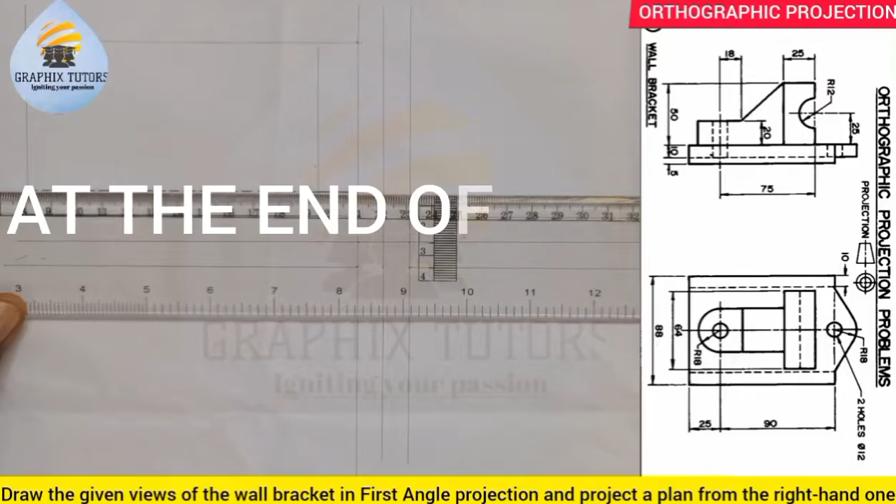In today's video, we are told to draw the given views of the wall bracket in first angle projection and project a plan from the right hand one, referring to the figure displayed at the right hand side of the screen. We are told to redraw these two views, then bring out the third view. In first angle projection, this first one is the front elevation and this is the plan. So first let us reproduce the figure displayed at the right, then we will draw the third part, which is the end view.

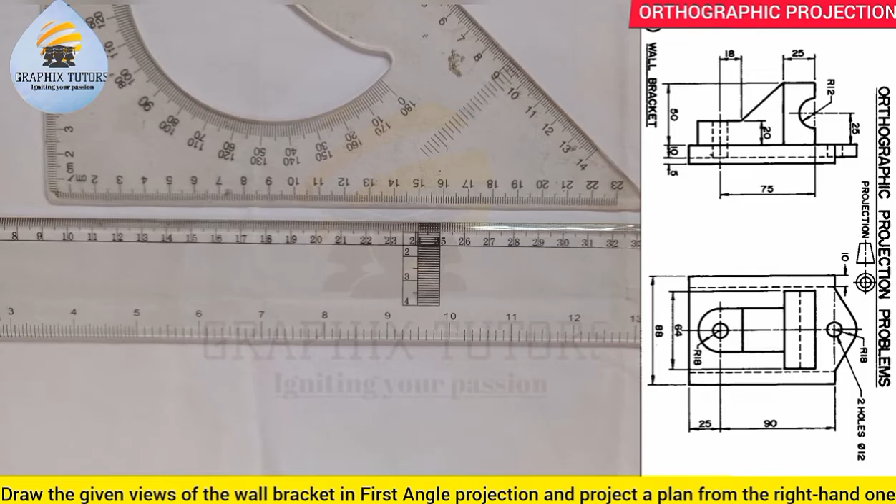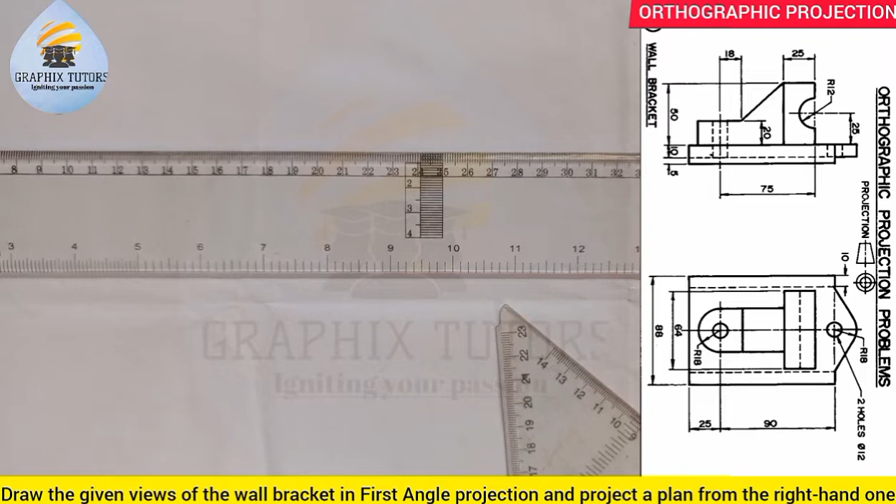So let's start. The first thing you do whenever dealing with orthographic projection is to draw your orthographic axis. You take your instrument and draw the horizontal line this way, then you draw the vertical line this way.

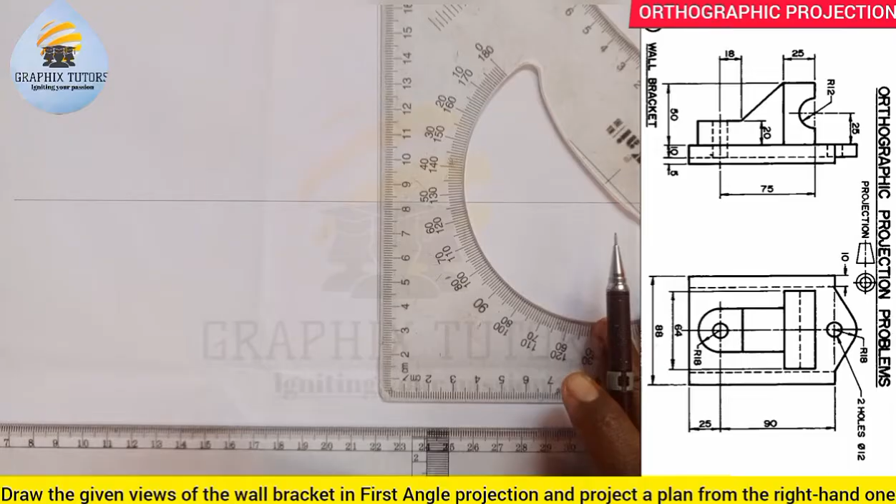And you take your compass and measure 10 millimeter on both sides. You can use your rule, just place it this way. Towards the left you measure 10 millimeter, towards the right you measure 10.

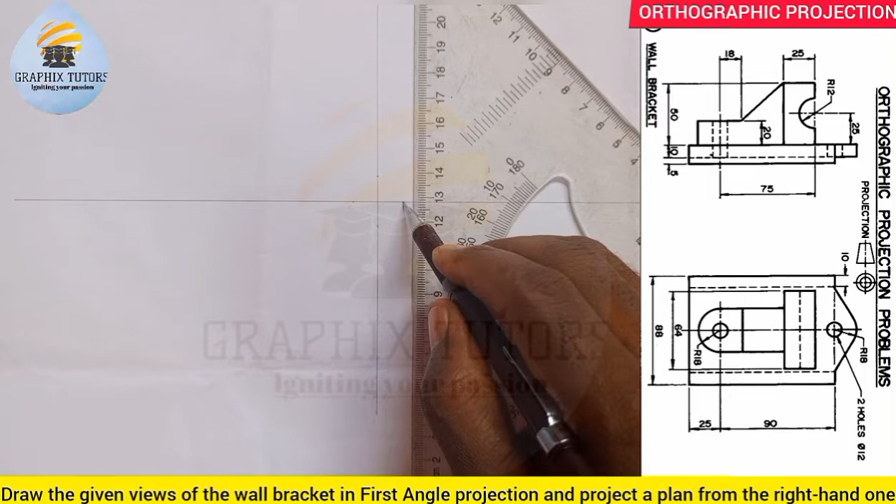And you do that for the vertical line too. Upward you measure 10, downward you also measure 10. And you draw a line that will pass through those points in this fashion, and also in this fashion.

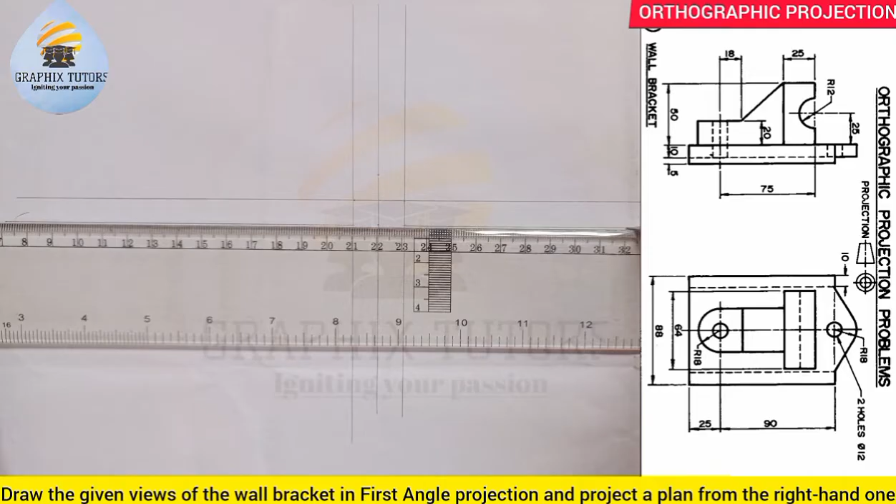You can see that, and you do the same thing for this also. You draw here and stop, from here also you draw another one and stop. You come here too and do the same thing, you draw here and you also draw here. So we're taking reference of these two points here, so whatever we're starting from, we'll start our measurement from this end here.

From here, we're giving the length of the front elevation, referring to this particular figure. We're giving the total length to be 25 plus 90, giving us 115, then plus the radius of 18, giving us 115 plus 18, which is 133.

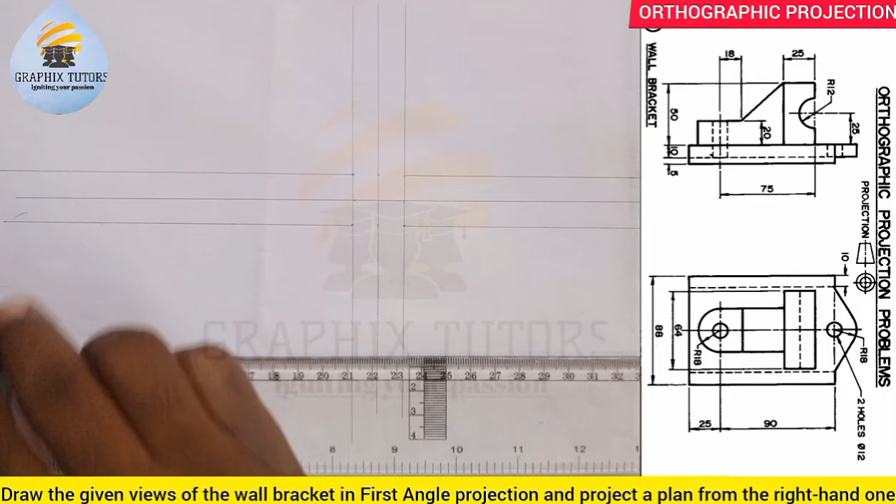So I am going to measure 133 from this side. If I do that from 0, I'll measure 133. 0, this is 130, and this is 133 here. And I'll take it up in this manner. So that is for the length.

Now for the height: the height here is given to be 10 plus 10, that is 20, plus 50, and that is 70. So the entire height here is given to be 70: 10 plus 10 plus 50, and that is 70.

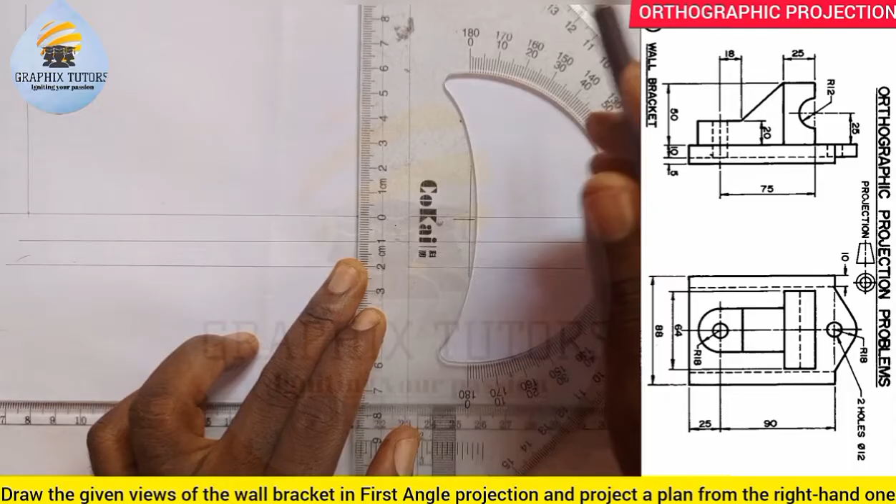So I'll measure 70 from here upward. Let me bring this down. I'll measure 70 from here upward, taking reference from this one here, 0 to 7 is given to be 70 at this point, and I'll close it up. So what I'm doing is just reproducing that given figure view.

Now bring out the box. So I need to start carving my image from that box. So we know very well that I'm going to measure from this part here, from this side. Let's look at the plan, since there's not enough information in the front elevation, I'll look from the plan now.

From this beginning here to this end here, which is from here to this end, from this end to this end, is given to be 115. So I'm going to measure 115, and I'm going to thicken it.

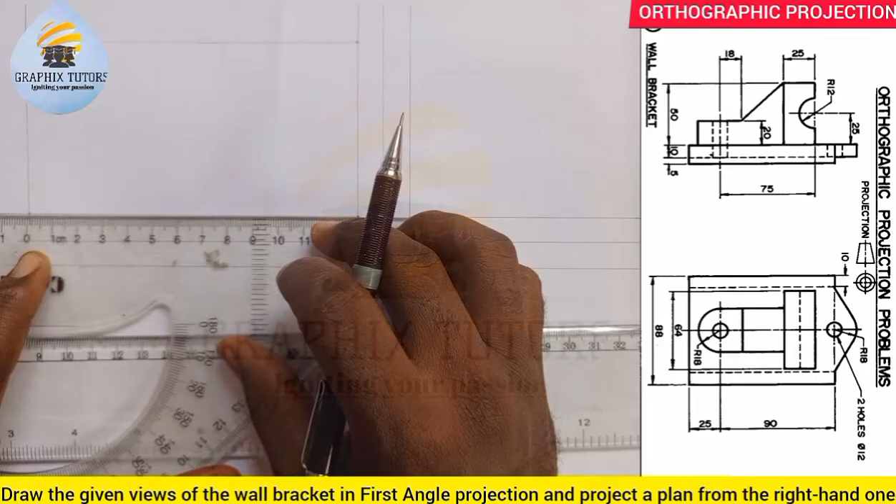So from this beginning here, I'll measure 115. From 0, this is 10, this is 100, 110, 115. That's what we have at that point, which I am going to thicken, straight down to this point at 115. Now that point, I'll take it up with my faint line first, this way.

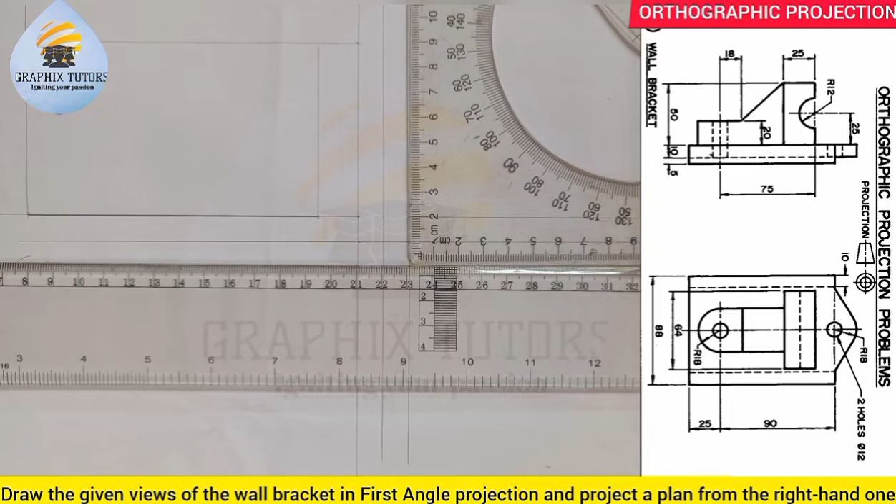You can see that. After doing that, the next thing we're going to do is measure 10, 10 up, because this is, if you look at my arrow, this is 10, this is another 10. So I'm going to measure 10, 10 in two different places. The first one is a hidden line, while the second one is a thick line here.

So this is 0. Let's say this is 10 and this is 10, right? I'm going to draw the first 10 coming out straight, and it is a hidden line from here. Let's do a shot this way.

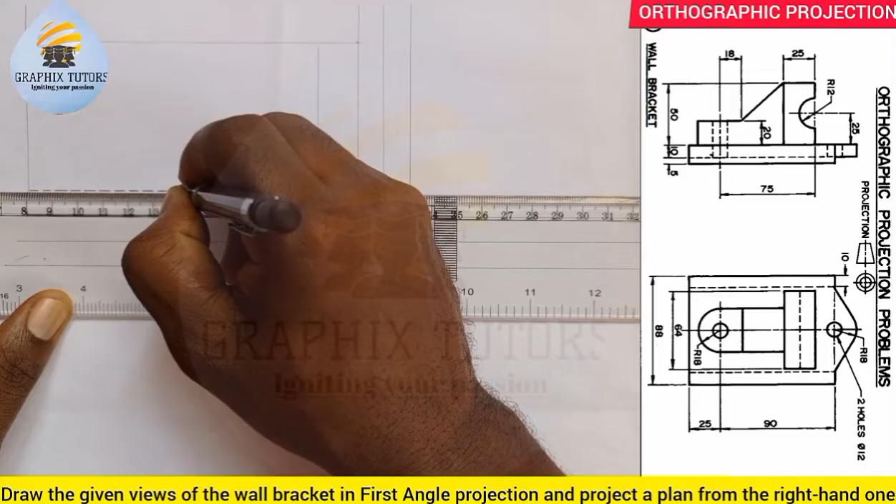Then from here is now a thick line, as shown in the diagram. Then the next 10 is a thick line all through. From here, I'll draw my thick line all through. You can see that.

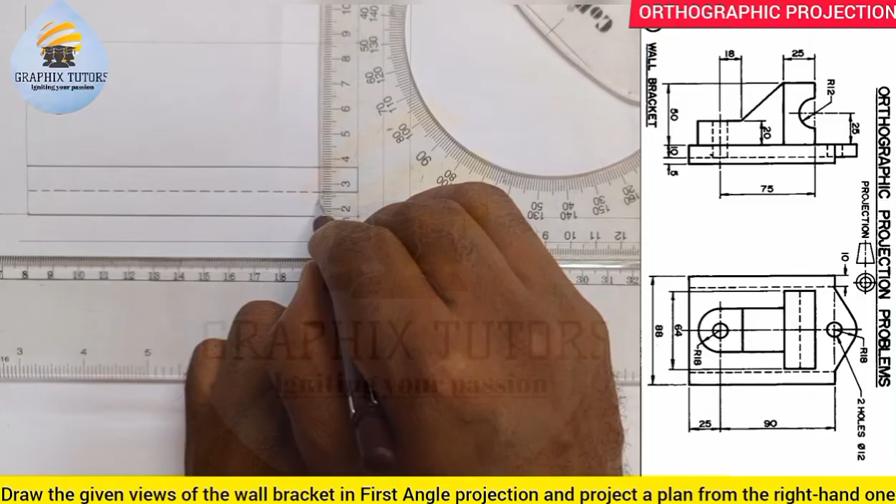I'll close it up. From this point here, I'm going to close it up. And here also, I'll close it up. From here too, I'll close it up.

Is that okay? Now the next thing is, what I'll do here now will be to get to this center here. Look at this line here. This is this line of 75 here, from this end here.

You look at the plan. Look at the plan from here to this point here. It's given to be 25. And this point here, the same thing as saying this point here, right? So I'm going to measure 25 to get the center of that line that we have there.

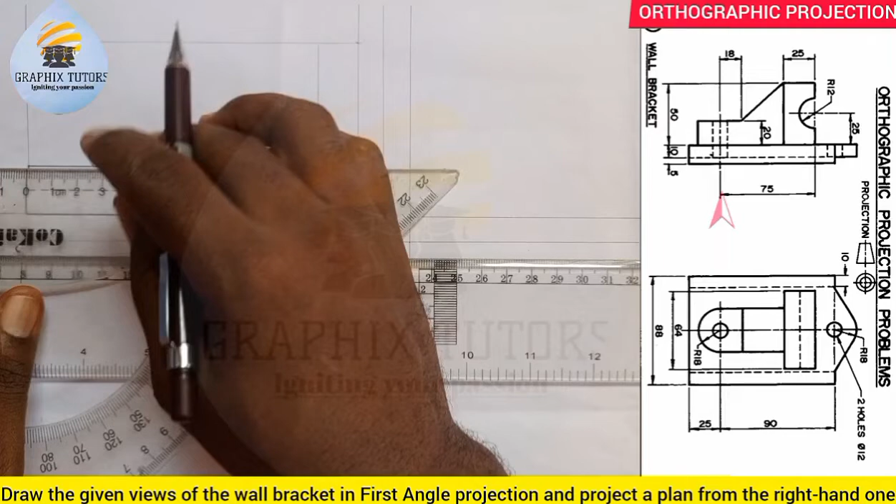So I'll measure 25 from here, from 0, 25, right? That 25 there you're seeing will just be a center line, because we are saying a circle is there, as you can see from the plan. So it will just be a center line you put there to show that a circle is there.

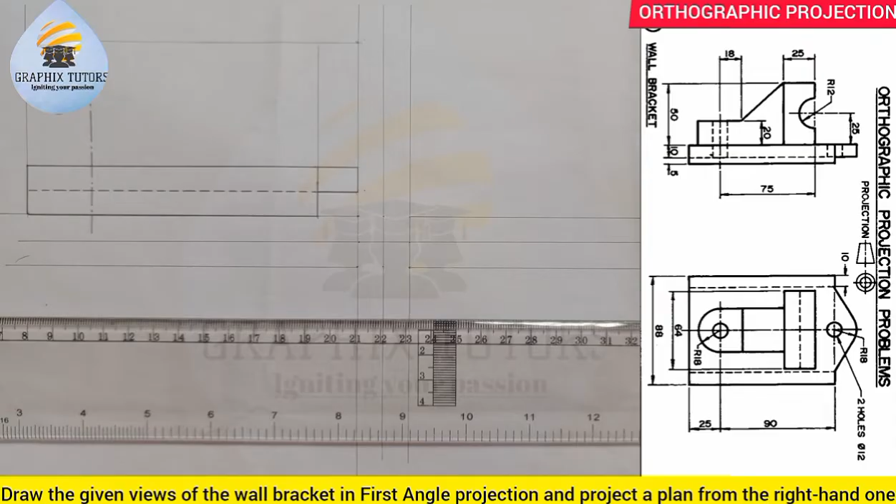Is that again? Now after that, the next thing you now do is the radius of the height, or the radius of that circle there. Before I do that, the height here is given to be, you will now measure a height of, like I told you, 20.

So I'll measure a height of 20 from this base here. This is 20 here. And I'll draw a faint line first of all in this fashion. Can you see that?

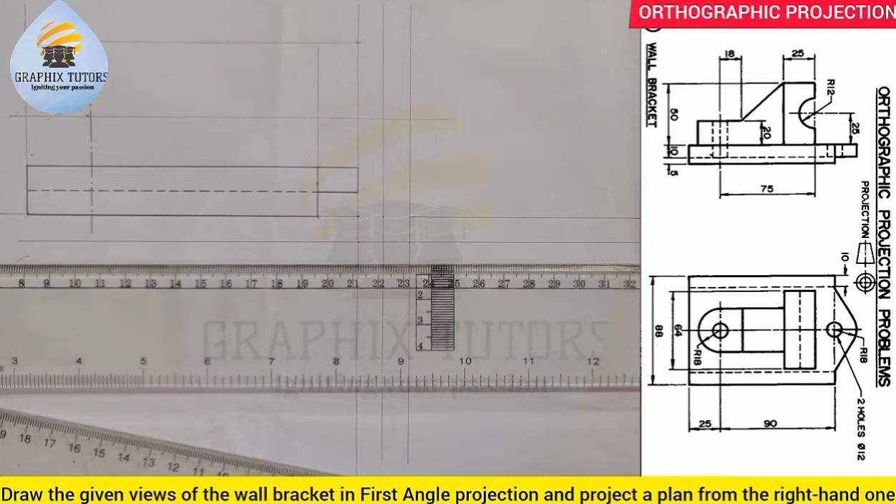Now after you've done that, the next thing you now do is, if you look at the radius from the plan of this same figure you are seeing here, this figure here is the same thing here. We have a radius that looks to be 18, right? Radius of 18 from the center.

Look at the arrow. So from here, I'm going to measure 18 backward from 0, and this is 18 here. I'll just draw, as you look at it, a thick line. I'll thicken it from here downward to this way, taking it from here downward to this way.

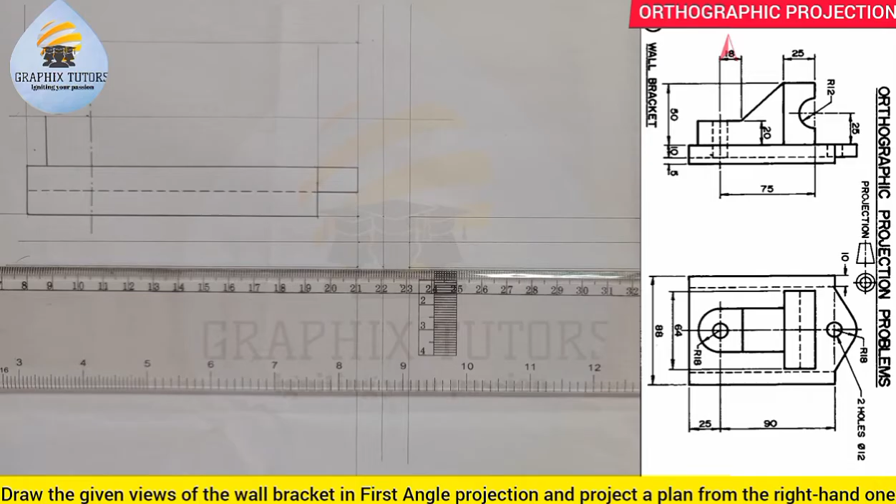You can see that. Now, from this center line to here is 18, according to the radius you're seeing here. Then from this center line to the next point also is 18. So I'll also measure another 18 to the next point here. So from here to here is also 18. 0 to this 20, and this 18.

That's taken now. So I'm going to thicken it to that point. I will thicken it to that point. Can you see that? Now the inside radius given here will be given to be the radius of...

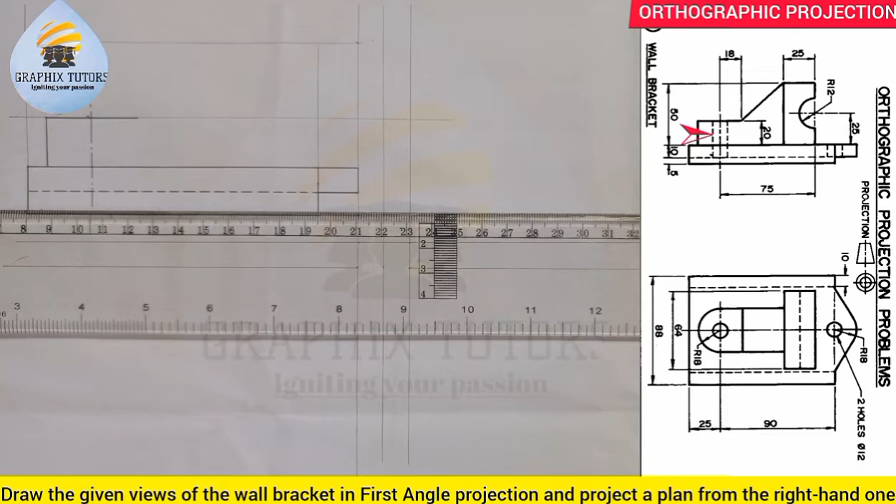We have say 2 holes. You can look at it from this plan here. It says 2 holes, diameter 12. So the circle you're seeing here has a radius of 6. Is that taken? So the circle you're seeing here has a radius of 6.

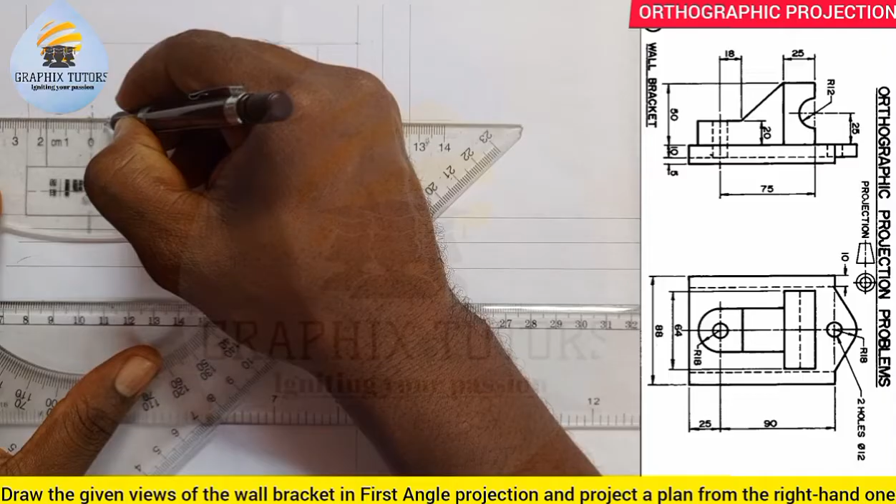With a diameter of 12. So if I measure 6 to both sides, starting from my 0 to the left, I measure 6. This is 0 to 5, then this is 6. To the right, I measure 6 also. So this is 6 here too.

Right? Let's check that again. So this 5 and this 6 here, this side is 6. And I'm going to bring it down in this fashion, as a dotted line.

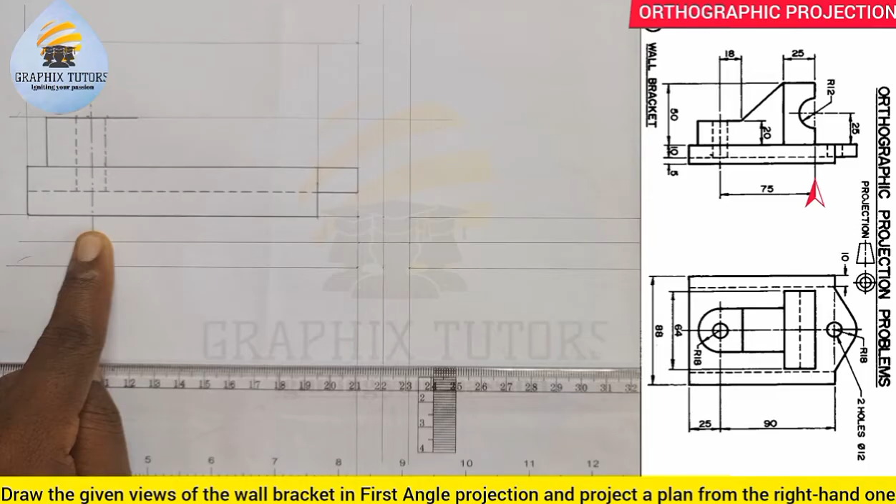So now the next thing that we are going to do: from this center here, which is this center you're seeing here, to this point here is given to be what? 75. So I'm going to measure 75 from that center point there. 75 from the center, 0 to 75. You can see that. And I'll take it up. It will go and touch the highest point here. Is that taken? Faint line first.

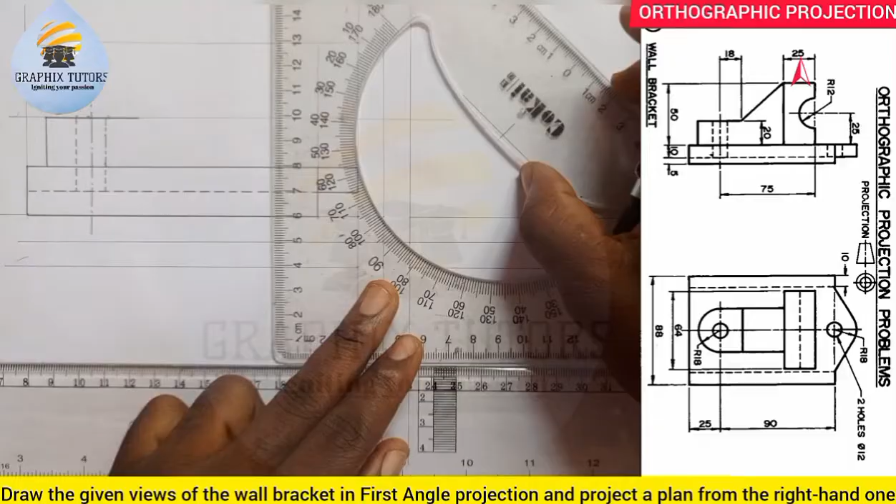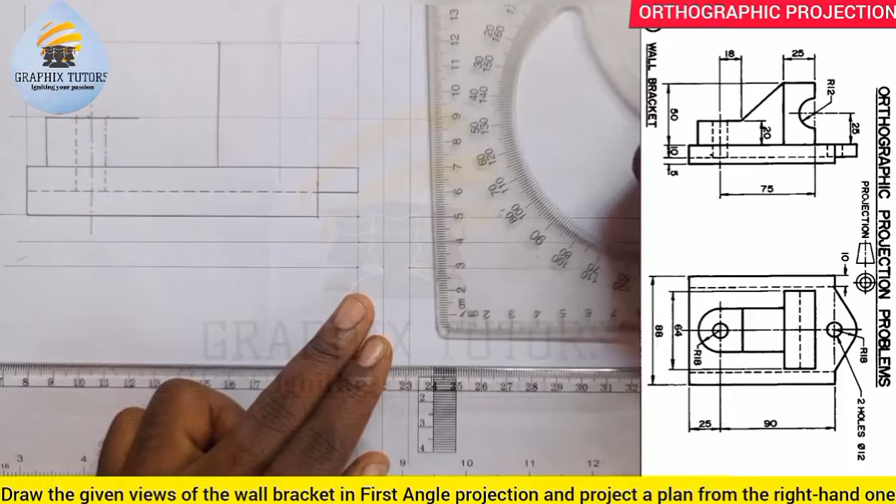Then from the end here, which is this end you're seeing here, I'll measure 25. So I'll measure 25 in this direction from the end here. 0 to 25. Right? So from there, I'll bring that down with my thick line. You can see that. Now that top is touching this point here, right? So I'll just draw my line from that point to come and touch this point here.

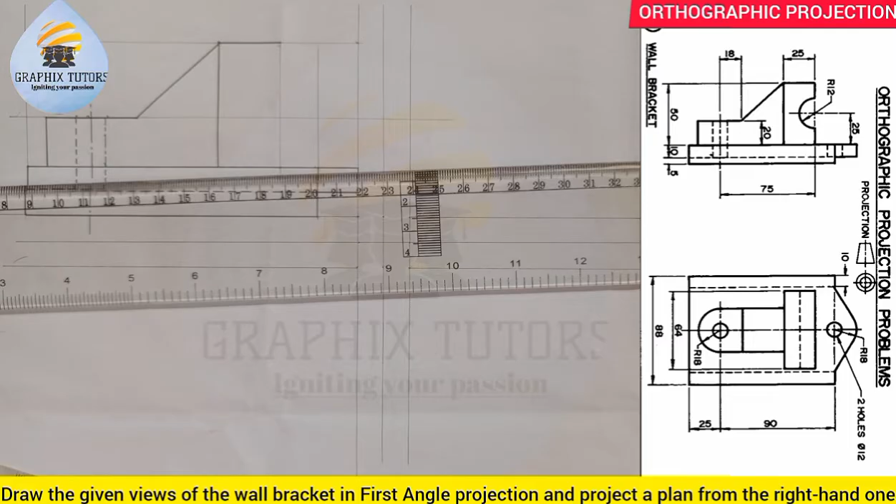Right? After doing that, I'll also thicken this point too. From here, I measured to this point here. Is that taken? Now the next thing I'll do is I'll measure a height of 25 upward to get the center of this arc here, this semicircle here. Right? I measure a distance of what? Of 25. So from here, I'll measure a height of 25. This is 0, this 20, this 25.

So here will be another what? Another center. Is that taken? So this point here will be another center. A long, short, or circular center line. Can you see that? So from that point, the semicircle has a radius of what? 12. So I'll take my radius of 12 there.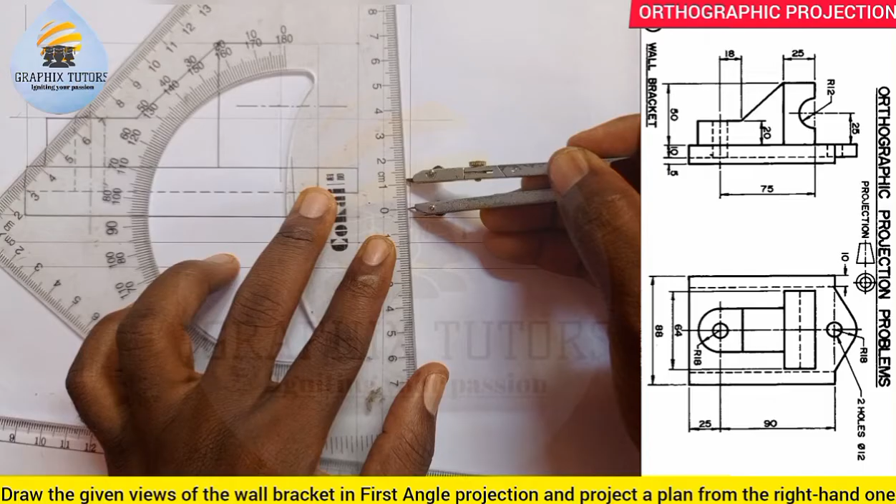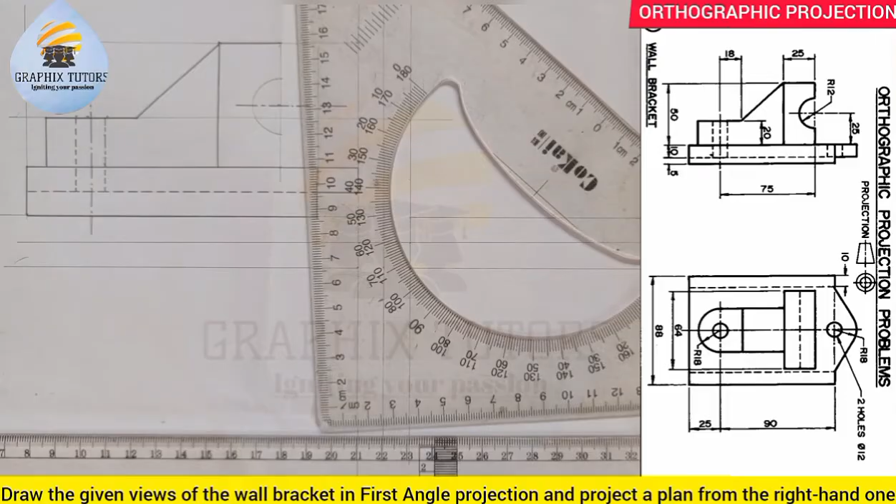So I'm going to measure radius of 12. This is 0. This is 10, 11, 12 here. Right, as the radius. And I'll place it at the center point here. And I'm going to draw my semicircle. You can see that. And I'll close it up with my thick line as shown in diagram. What I'm just doing is I am replicating the diagram, right? So this is what we have there, right?

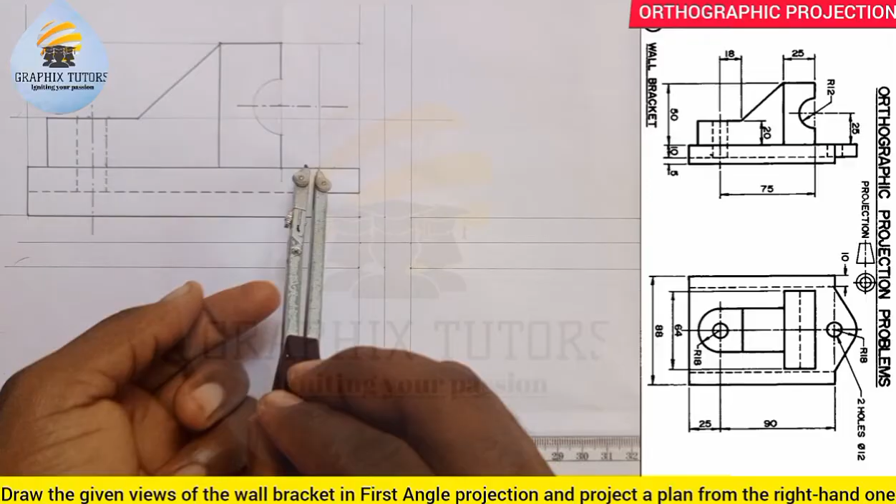So if you look at it closely, then the other end in here, from this point here, we have a circle which has a radius of 6 also, like I told you, 2 holes. So the same thing that happens here will be the same thing that you are going to apply here. Dots here and here, right? Let me measure that again. From here to this point. Then from here I have this, right? And I come here and I have this. That is what I am going to do.

Radius of 6, or you can use your compass, your rule, and measure 6 to both sides. So this is 6 here, and this is also 6 here. So let me bring it down with my hidden line. This is my hidden line here, and this is also my hidden line here. Can you see that? So this is what we have. We have successfully drawn out the front elevation that you can see.

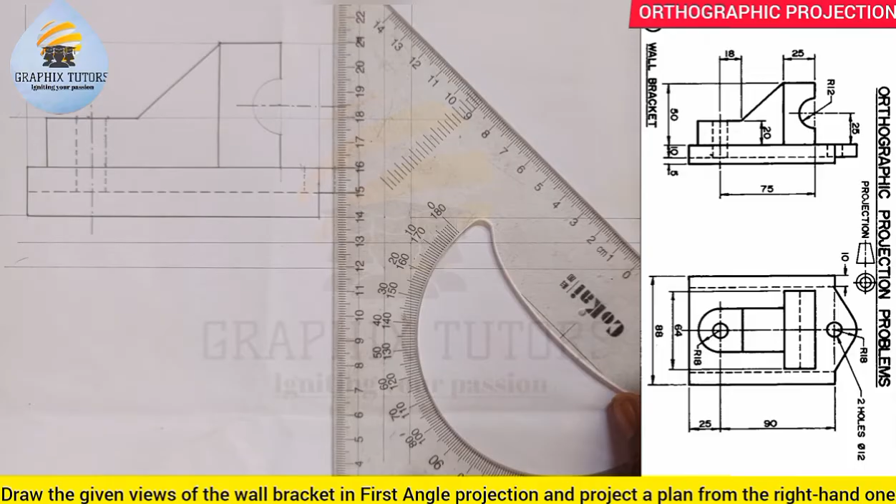Now the next thing that we are going to be doing here is to draw out what? The plan. To draw the plan is not a big deal. What you just do is you need to project those points down. First of all, project the two ends of the plan out. Just these two ends. So the question is, what will be the height of the plan? So the elevation is from here to here, right? So the height of the plan will be looking at it from this direction.

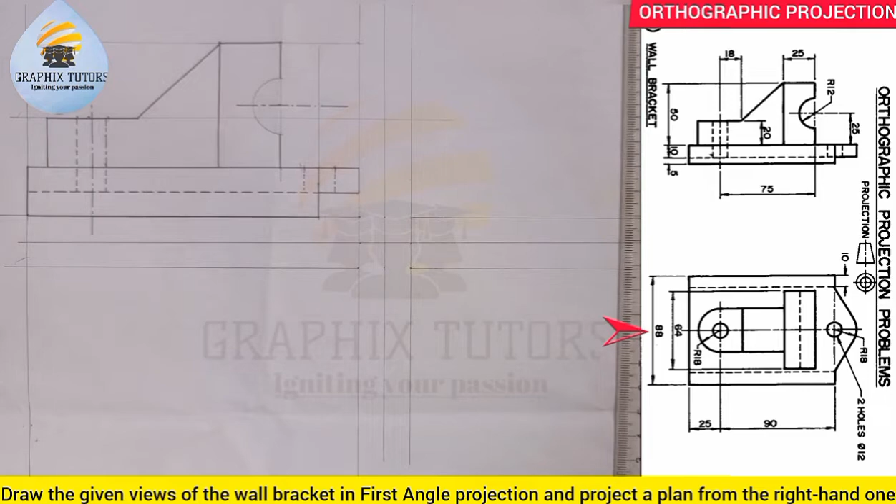And let's give it to be what? If you look at it closely, that is 88, right? We have 88, so I'm going to measure 88, from 0 to 88. This is 80, right? This is 80, and this is 88 here. Hope you can see that. That is 88. And I'll just draw my line in this fashion, faint line first.

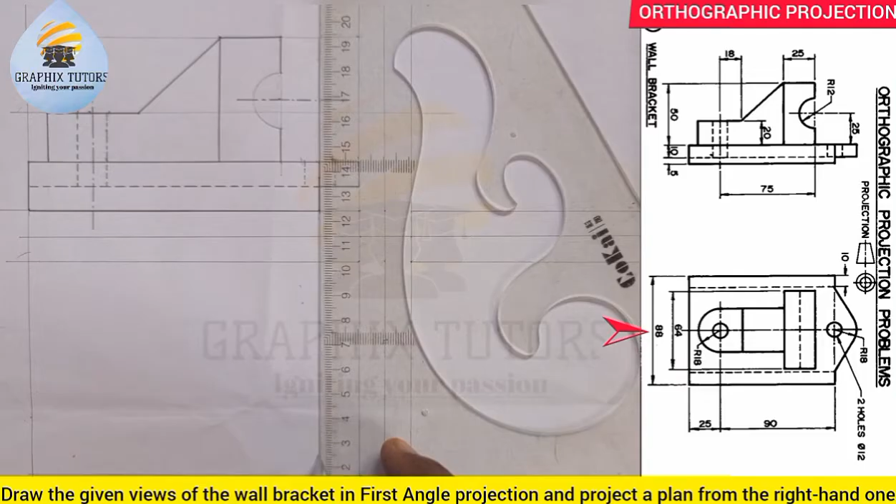Hope you can see that. Now, after doing that, the next thing we'll do is from here to this point here is thickened. You can see that. So which is the point? I'm talking about this point here. I'll bring it down. So it is thickened from here to this point here.

Now the question is, where is the point? This is the point here, right? That is the point from the circle that you have in here. Is that thickened? So I'm going to thicken it from this point to this point here, and from this point to this point here, right? And the same thing from this point also. I'll close it up to this point here as shown in the diagram.

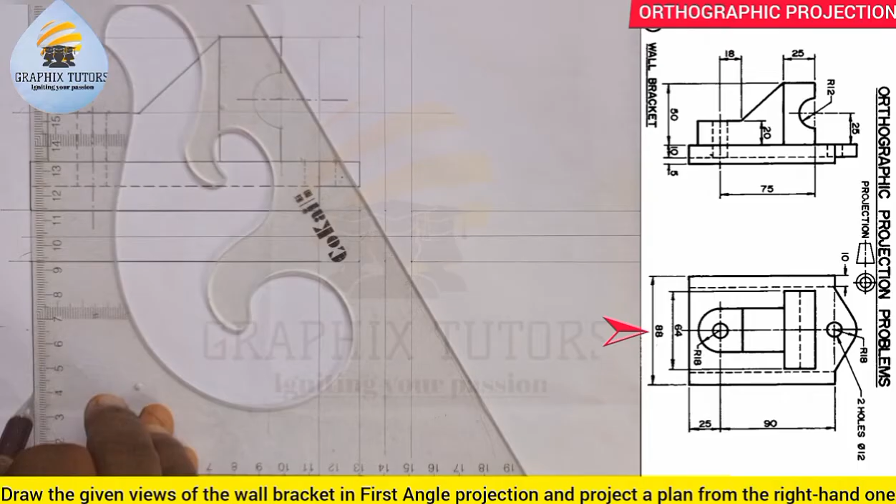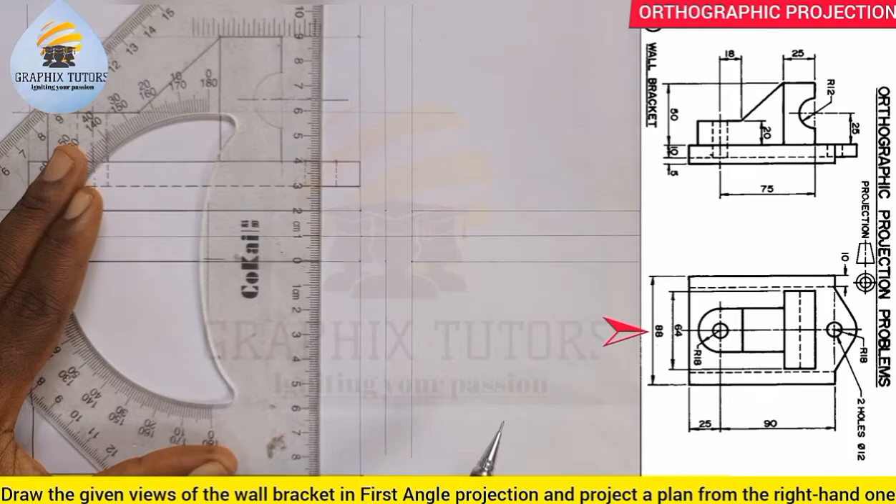Now after that, the next thing is I will have to get the center of 88, which is 44, right? Get the center of 88, which is 44. So if I start from here, this is 0, and this is 88, right? So this will be 44. So I'll use my center line on that point, which will be long, short, this way. Then I'll now measure from this end, right?

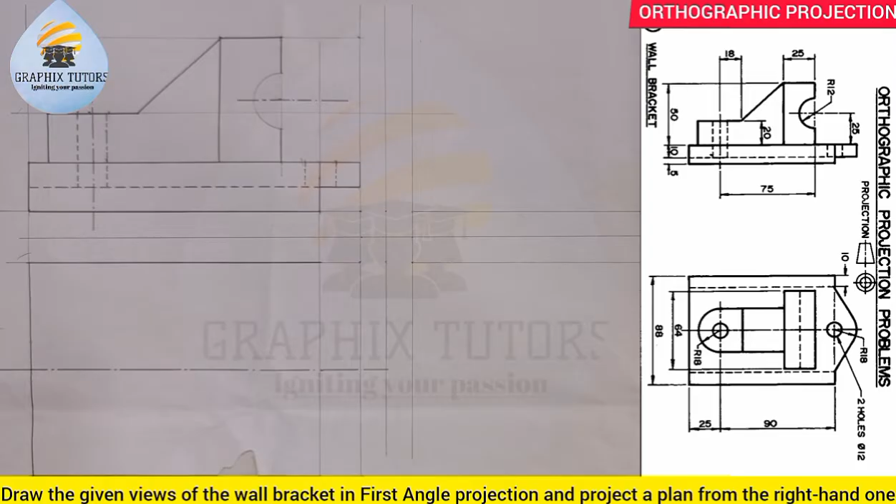So I'll now measure 10, 10. If you look at it, this hidden line you're seeing on both sides is given as 10 millimeter. So from here, I'm going to measure 10 millimeter. 0 to this is 10. Similarly, 78 to 88 is also 10. So that will now give us the hidden line that we need. Hidden, hidden, hidden, as you can see in the diagram. Similarly here also, I will do the same thing. Hidden.

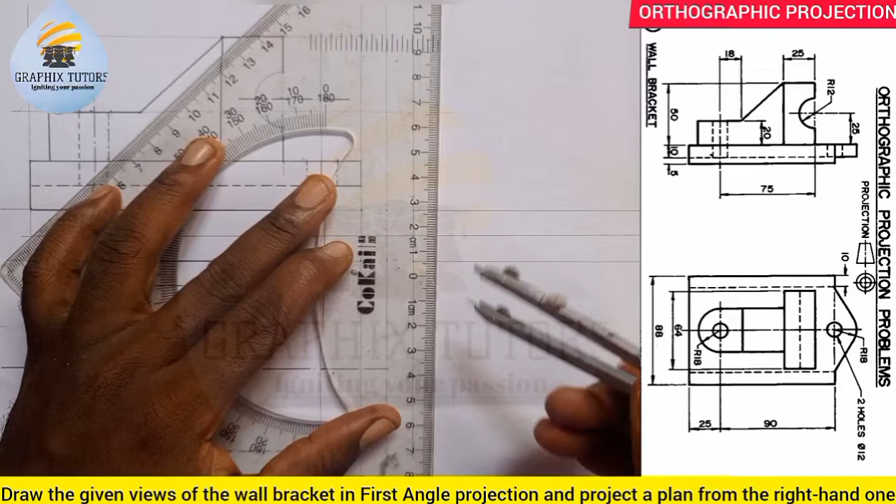Can you see that? Now the radius here is given to be 18, right? This arc you're seeing here is 18. So I'm going to measure 18 on my meter rule from 0 to 18. This is 10, this is 18 here. Can you see that? And I'll place it at the center point here. And what will I do? I'm going to draw a circle, it's 18, right? So I'll just draw a circle this way.

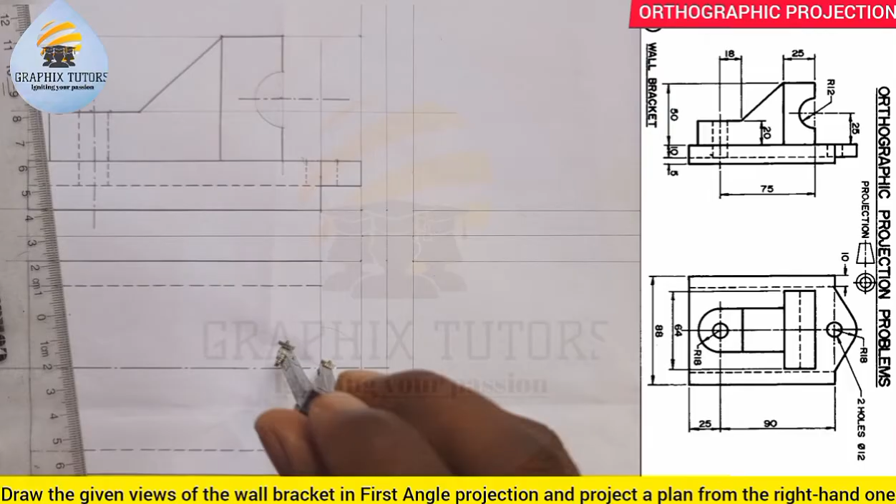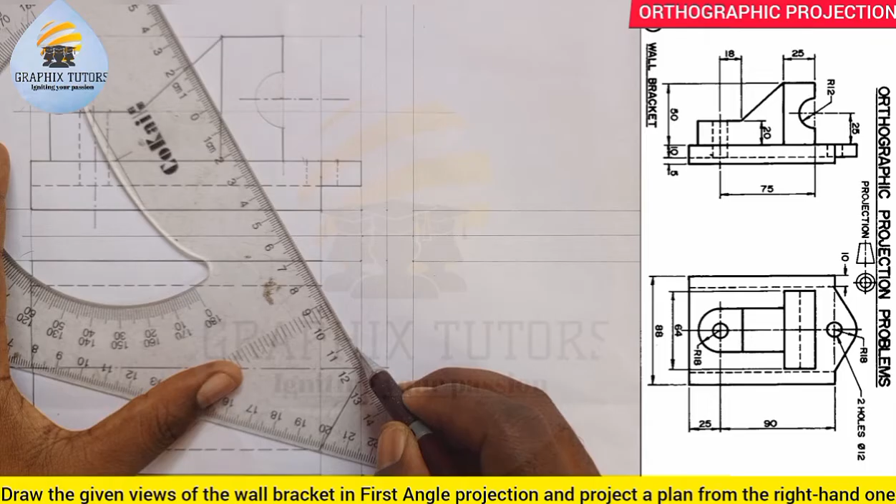Faint line first. So if you look at it closely, from this point of the hidden line, it is tangential to the circle. And from this point of the hidden line, it is also tangential to the circle. Can you see that? So I will now thicken this here. I hope you can see that. And here to here is thickened. I'm talking about this point here to here, thicken it. Then this point here to here is thickened.

So the next thing we're doing is there's a circle which has a radius of 6. So I can just take the radius of 6 here. I'll place it here and I'll draw. Meaning that this side is as a result of this here. Faint line and faint line. They are all connected together. Now aside that, we proceed.

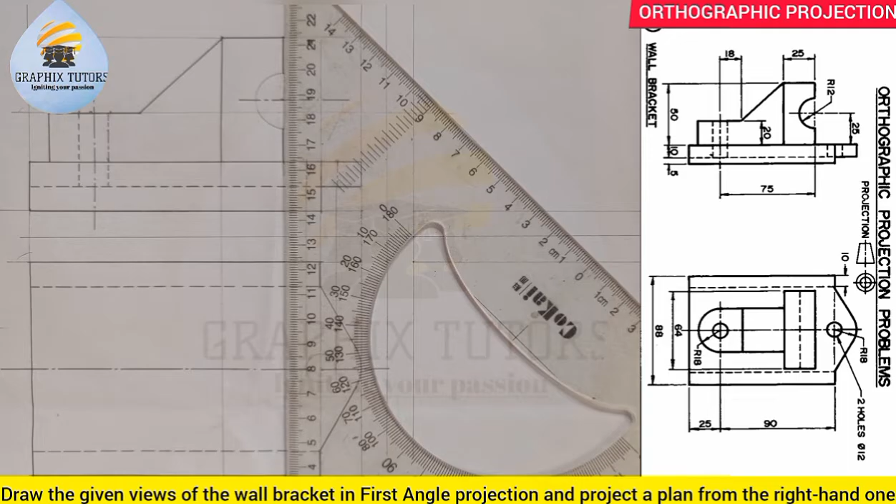So the next one is I can project this downward this way. Just bring these two downward. Don't stress yourself. So when you bring that point downward, I'll bring this point down here. Right? We're told that the length from here to here is 64. So I need 32. So I'm going to measure 32 on my meter rule. This is 32 here. And I'll place it at the center here, right? And I'll mark 32, 32. So that will be the thickness here.

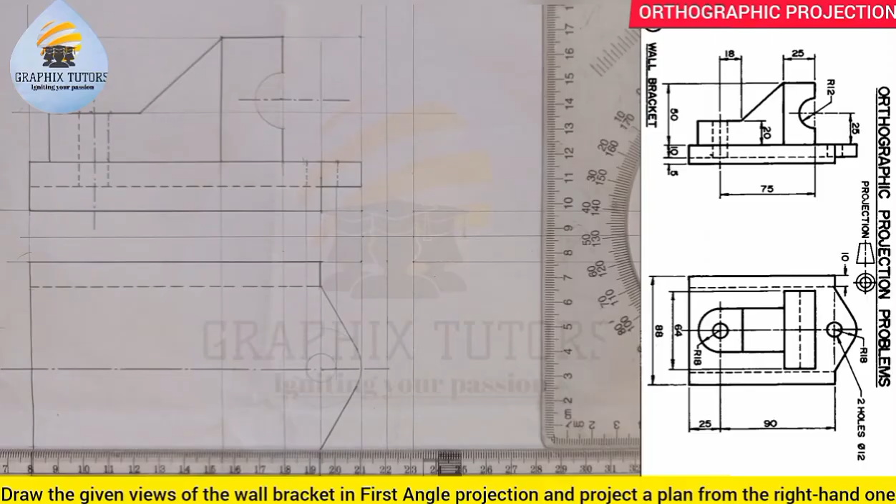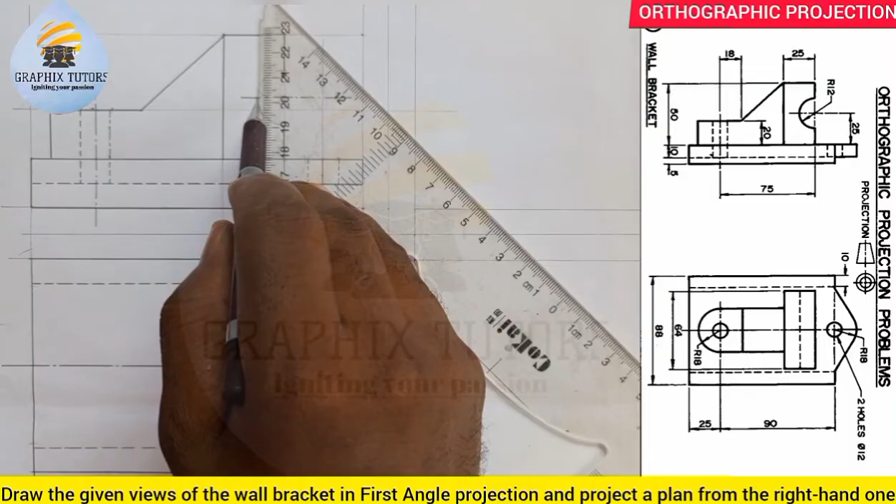So that's what I am going to thicken. So if I come here, I'll just thicken from here to here because I'm using this line as my reference point. I'll come here also. I'm going to thicken from here to here, right? And I'll close it up from here straight down to this point, and from here straight down to this point. And this hidden line you are seeing is the result of this point here, so that there's a hidden feature here. Then I'll bring this one down and I'll show my hidden line along this way as shown in the diagram.

Remember, I am reproducing that diagram that you can see on the screen, right? So now the next thing we'll do is the radius here is given to be what? 18, right? So I'm going to still measure, is it 18? Yes. So I'll measure radius of 18, which is the same thing as saying from here to here, right? That is 18. So before I do that, let me project this point downward first,

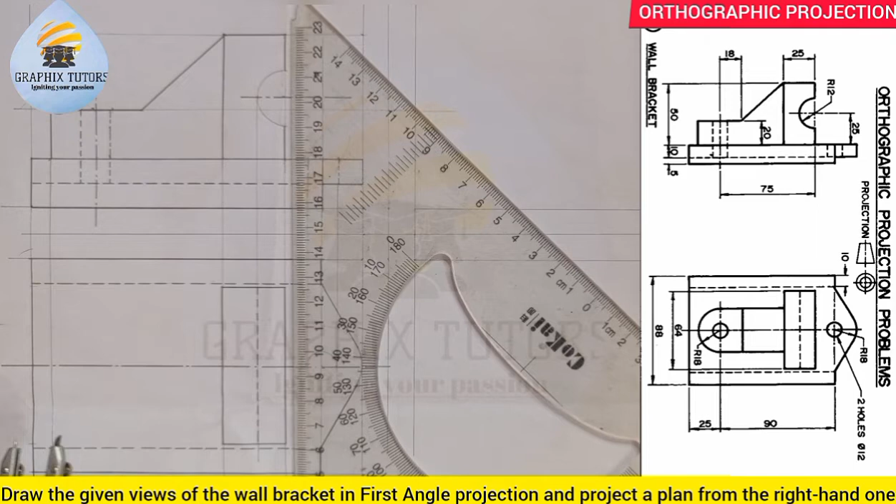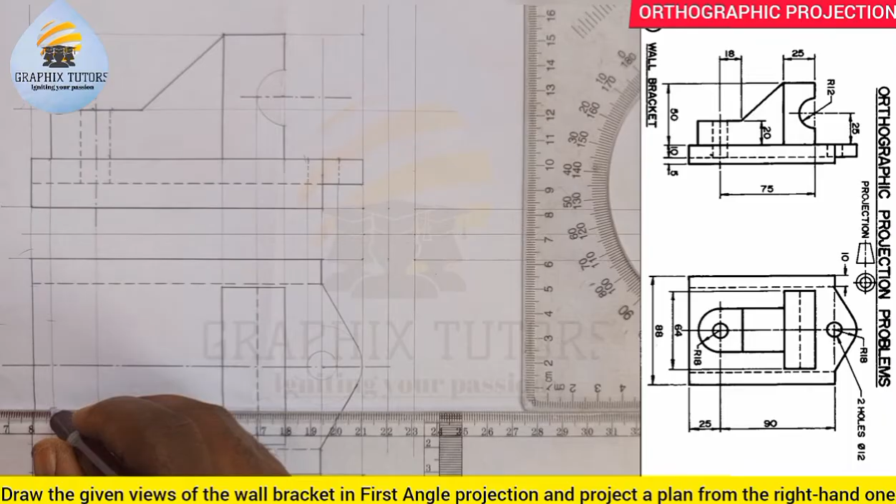right? So I'll now measure that radius of 18. This is the radius of 18, from here to the center is 18. And if you look at it, place it here and I'll mark 18 and what? 18. Is that taken? So if you notice it is an arc. So what I'll do is I'll just project this line downward from here, right? And I'll project this downward from here, faint line from here, faint line.

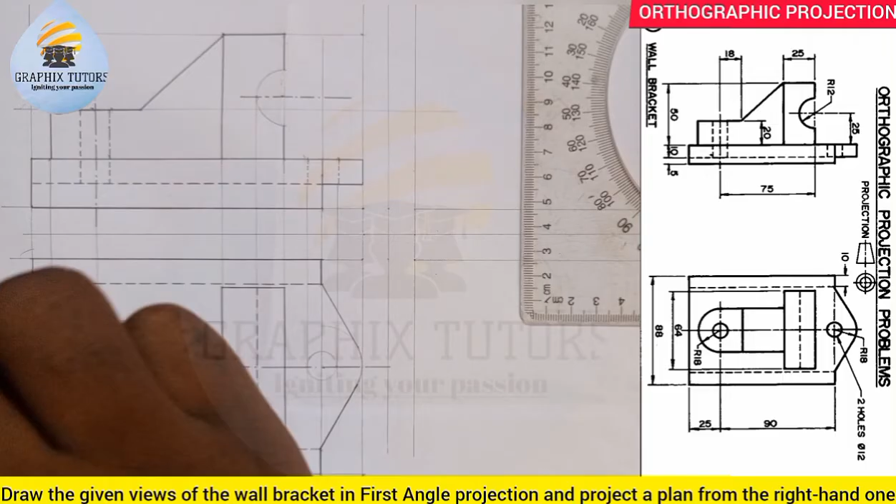So once I take my compass from this point to this point here, I'll draw my semicircle. Is that okay? I'm going to project it to meet the other guy there. So I'll project this from here to come straight here to meet this, and I'll project this from here to come straight here to meet this, right? Then the next one is this point you're seeing here. I'm going to project it down. And what do you notice? It is thickened.

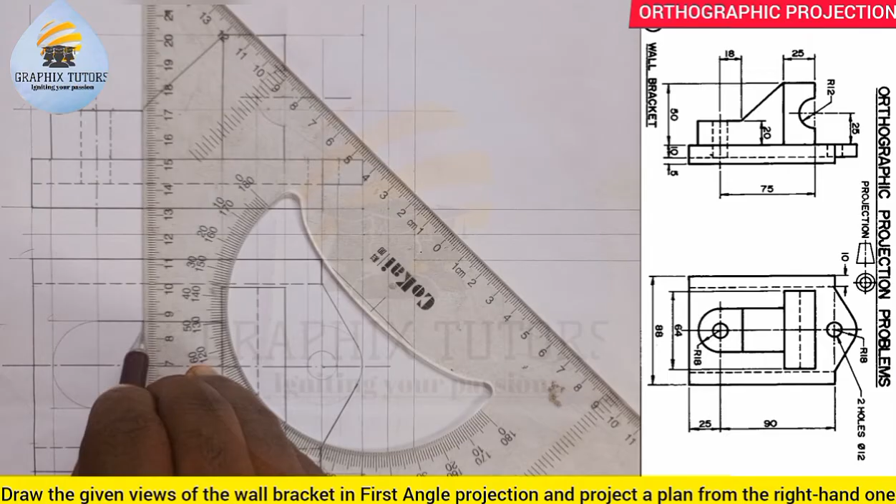Can you see that? Now the next thing is we also have a circle here, and it's the same thing as here. Radius of 6. I'll do it here. Right? Which is the same thing as this guy coming down here, faint line. Right? Now after that, what is the next thing that we have here? And that is all for reproducing the figure that's given on the screen here.

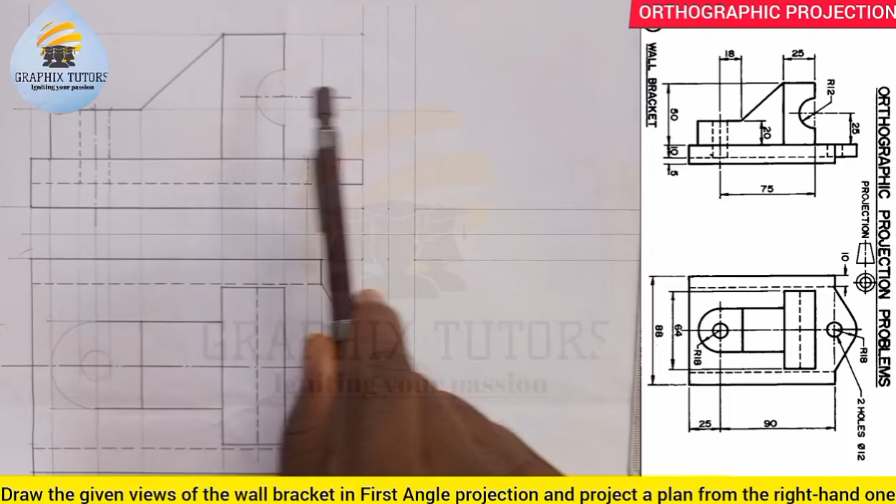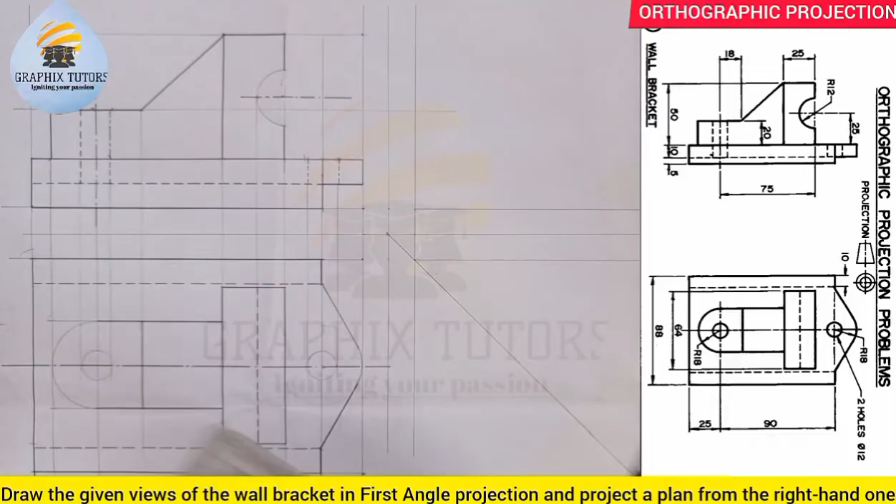So the next thing, we want to draw the end view, and the end view is always beside what? The front elevation. So the first thing I'm going to do is I will draw my 45-degree from the center point here with my set square and my T-square. So I'll just draw this out, 45-degree all together, and I'll move my T-square to this point. Whatever I'm drawing up will not pass the highest point here.

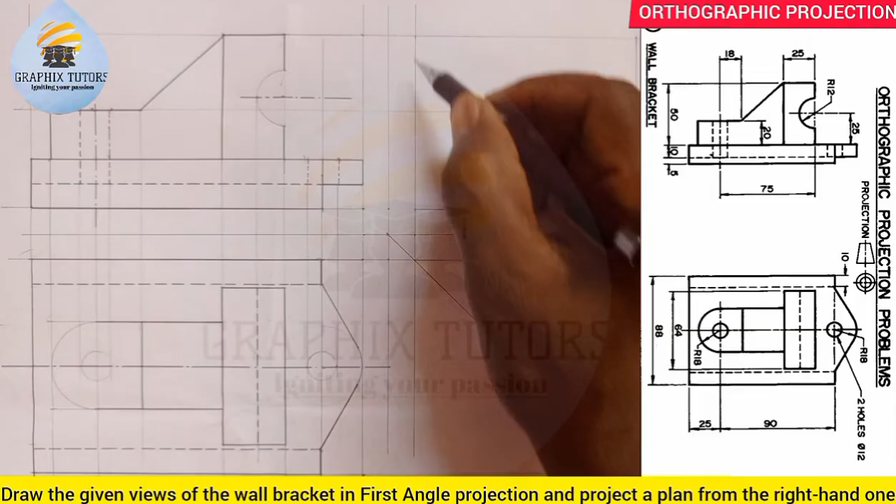Can you see that? So I'll project these two ends to come and meet here. And I'll project this one, it's already there, to come and meet here. So I'm going to take it up from here to here, right? And from here is already there. So this is my box here. This box you're seeing is actually my box, right? And this one is just this here.

So what I will simply do is all those edges here we have, I'll be projecting them this way. Project all those points this way. Project all these points this way. See what I'm doing? This point this way. This point this way. And this is what we have there. Similarly, let's start from this. Now if you look at it closely, right? I'll project these two ends, which is what we have here.

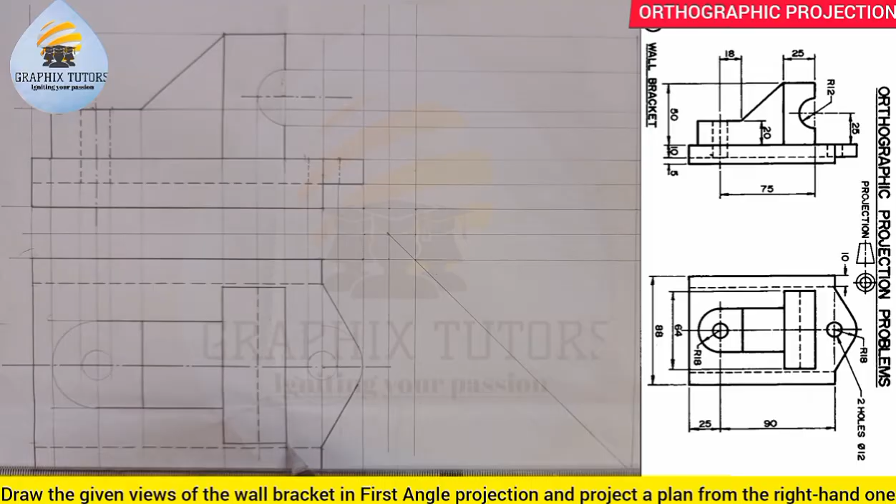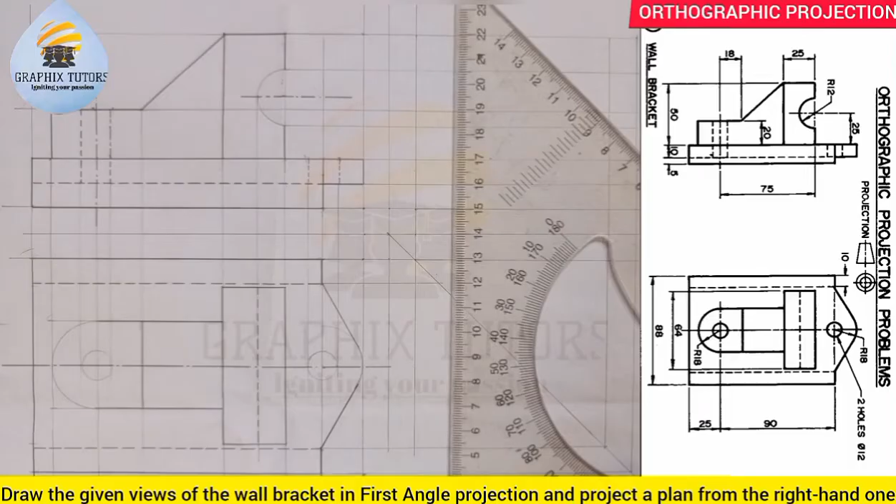Then the next thing is I'm going to project the hidden line that we have. Or better still, this box here we have, if I project it here, let's project this also. I'll show you something now. To touch here and to touch here, which I am going to take up, right? Which I'm going to take up, right? So what do you notice?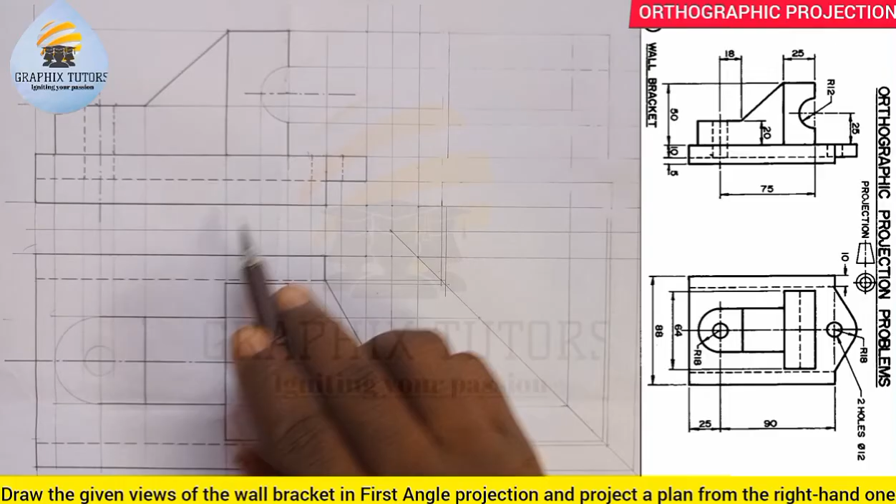The hidden line we're talking about is the same thing as this guy here. So there will be a hidden line in front of it. So since I've projected that point, right, and the point is meeting this here, this hidden line is the same thing as this one here, right? So it means that it's true when I'm looking from the front. All I do is from that point I'll take it up to come up here, and I'll take this one too. It's the same hidden line I projected from here also. Let's not get it twisted.

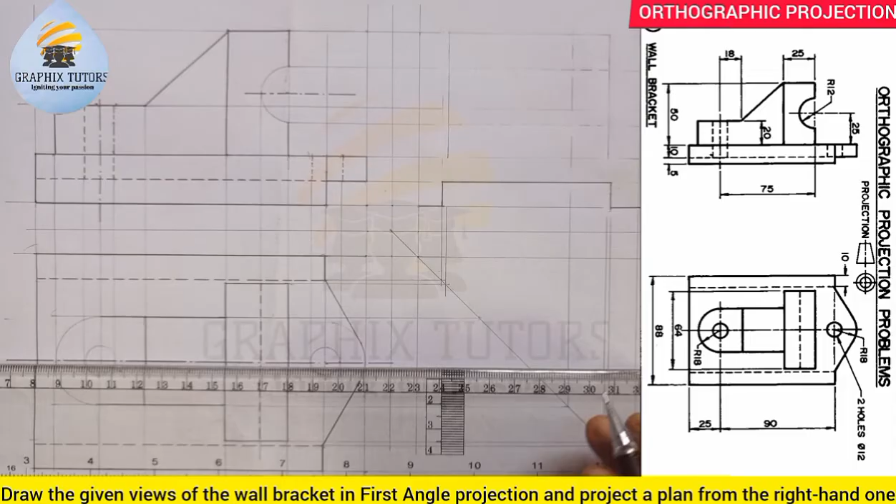So I'll take it up. Hope you can see that. And also here I'll just show my line this way, so that it's true, right? So I can easily close this side up and also close it up too. So we'll proceed. Now the next one is I projected this edge here. You can see this line. I projected this, and I projected it to touch here, right? I took it up with my T-square. So this is what we have. I did it for the other side too. When I projected this end here, I projected it up in this way.

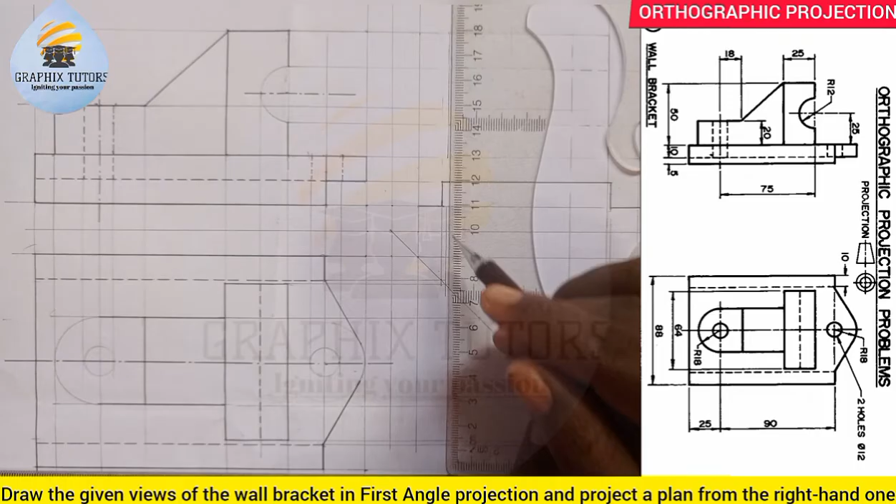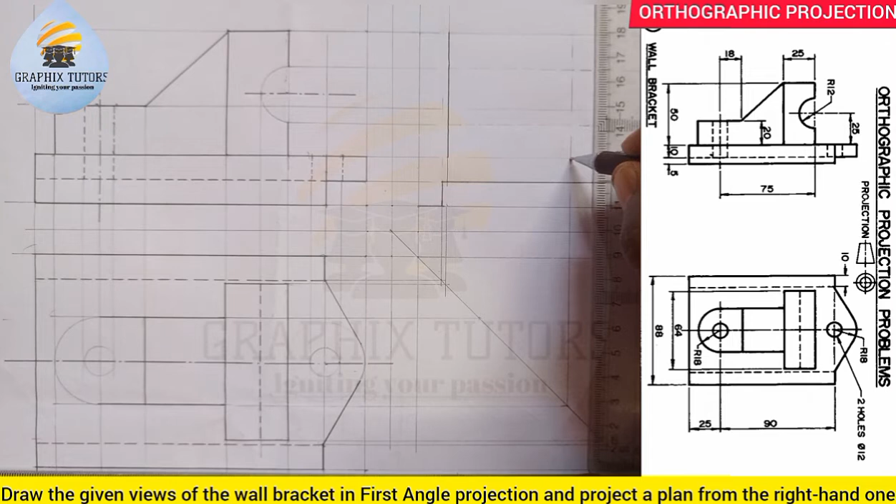Now what do you notice? These two points I projected are for this figure here. So anything I'm doing must start from where the figure starts and end where the figure ends. And this line here is starting from here. I'll project it up, and here I'll also project up too. Is that again? Now

once I have done that, I have to be very careful in doing whatever we're doing. Once I have done that, let's see. Talking about this figure here, right? And this one here too. So once I've done that, I'll have this, close it up.

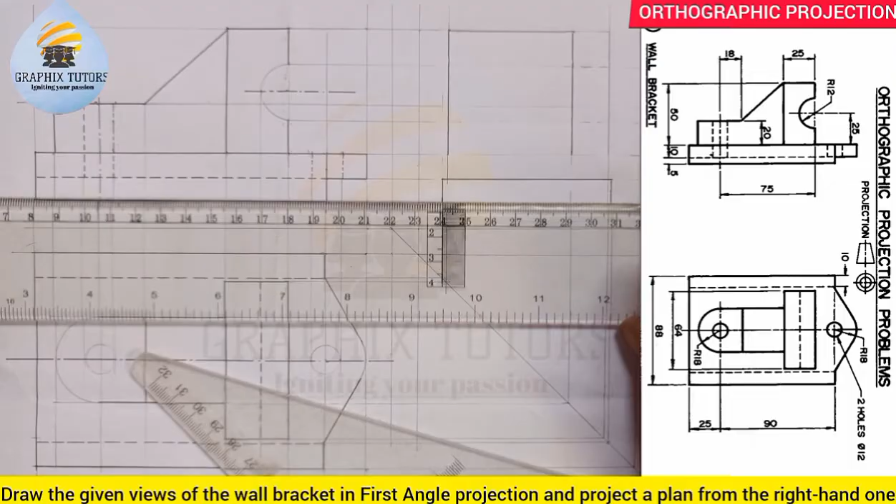I'll also draw my hidden line because of this figure here. When you're looking from the front, you will not see this. So my hidden line will come from here, so that there's a through there. And from here too also. See that? There's a through here.

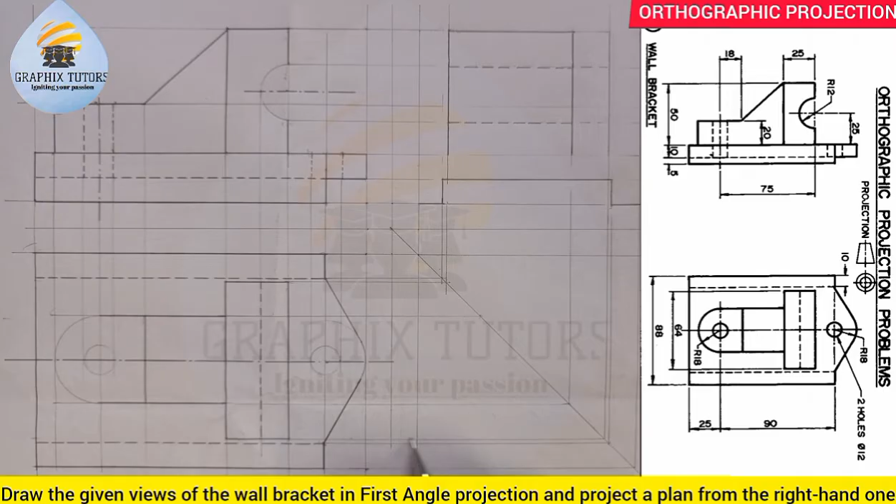So it stops there. Now the next thing that I will be doing, if you look at the line here, this is meeting at this point here. So I'm going to remove this. This is not supposed to be there. So let me remove that. So I have extended it, right? Because what you're seeing is what is coming up.

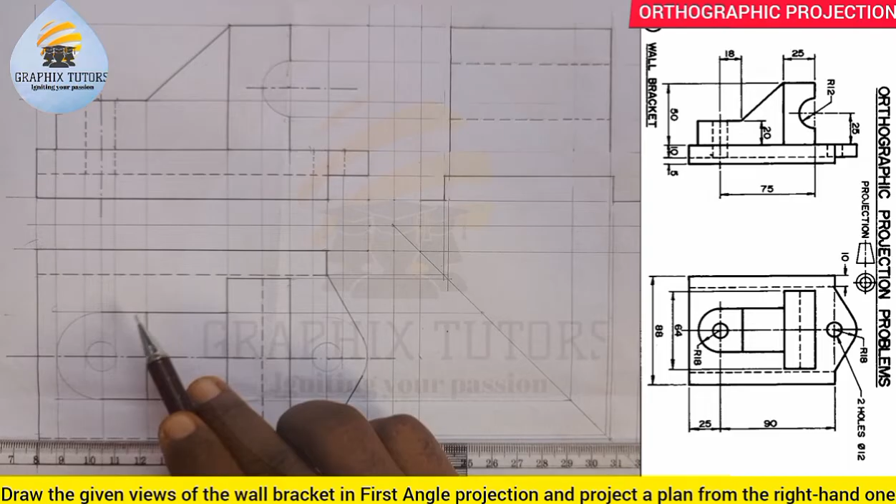You can see that. Now the next thing we're having here will be these two shapes here. So if I project them out, this will come up, and this one too will come up. Right? I projected the two here with my set square. I projected this one to this point. I took this one up. Right? So we're focusing on this. So that is where it will be, at this point here.

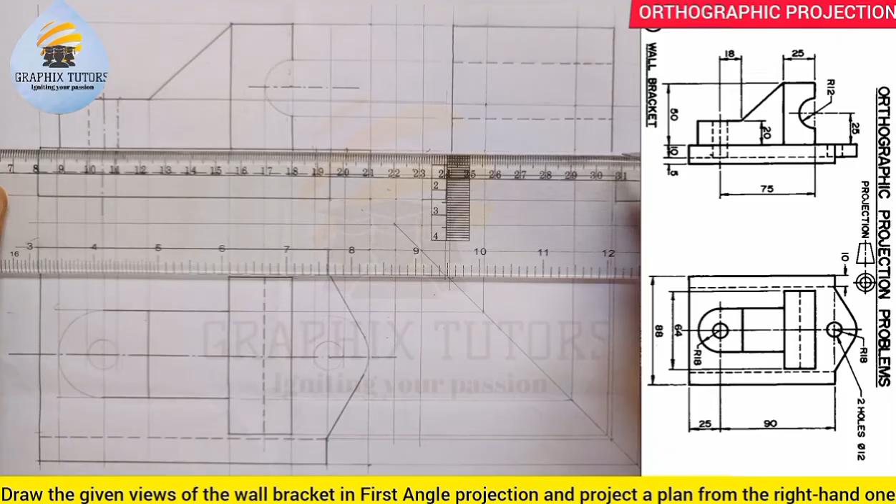So what do you notice? It's ending here. This is where both of them meet, and it's starting also from here. Right? So I'll be seeing it as a straight line. You'll be seeing the curve like a straight line. So I'll just draw my straight line from here to this point. Then I'll close it up in this direction, and I'll bring it down this way, and here this way.

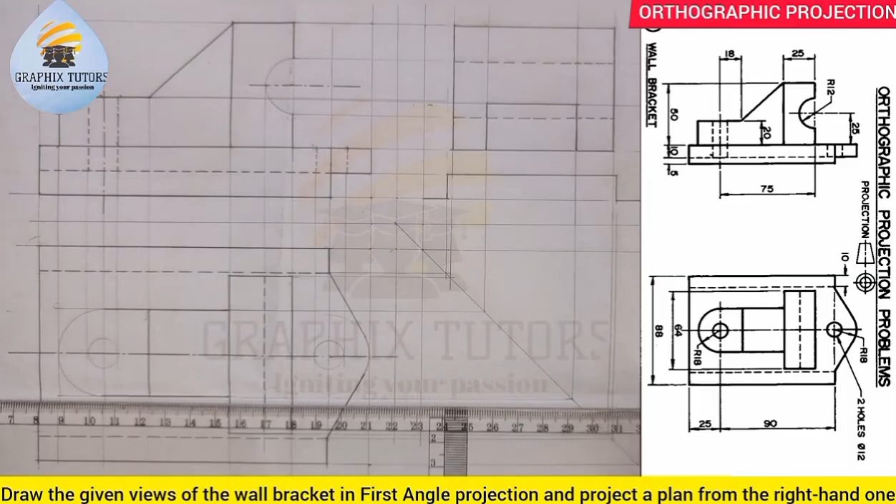When you're looking at it from the front, you'll be seeing it as a straight line, right? And the circle that we have will be seen as hidden line too. So let me project the circle too, because you cannot see through that figure. These two circles we have here, and I'll take it up. This, this, this. It's even coming from this other side here.

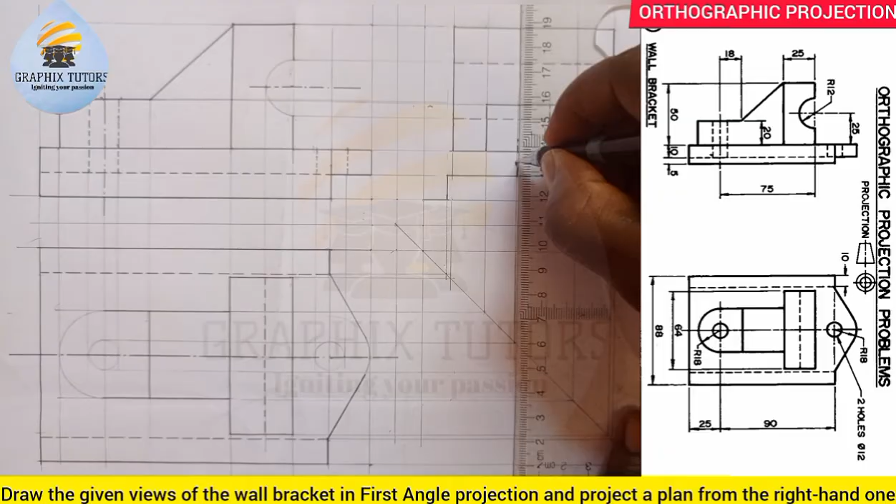Can you see that? Now the next thing that we are going to be doing here is that I'll move this. This will come from here and stop at this point. And this will come from here and stop at this point because of this that we have here, right? And I'll just close it up. So we're still moving, we're not done yet.

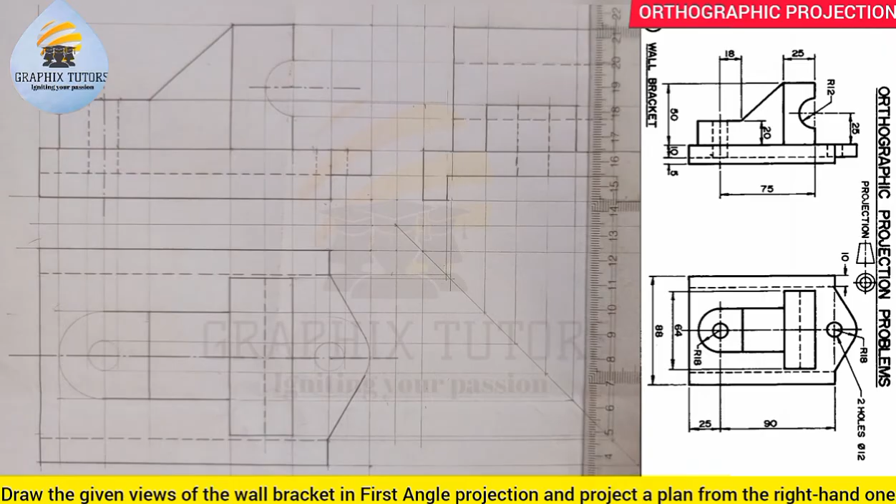Now there's a point here, which is this point, and that is what we have here. Is that taken? So it's coming from the top also and meeting that point, this line you're seeing here. So that means this is still coming from here to meet here. And this is coming from here to meet here. Hope you can see that. This is coming down. You see it as a straight line, which is this we have here.

Now, what else do we have? So this is what we have here. We have successfully reproduced the end elevation, which is what we're asked to do. We're supposed to project the plan to get this. So this is what we have here.

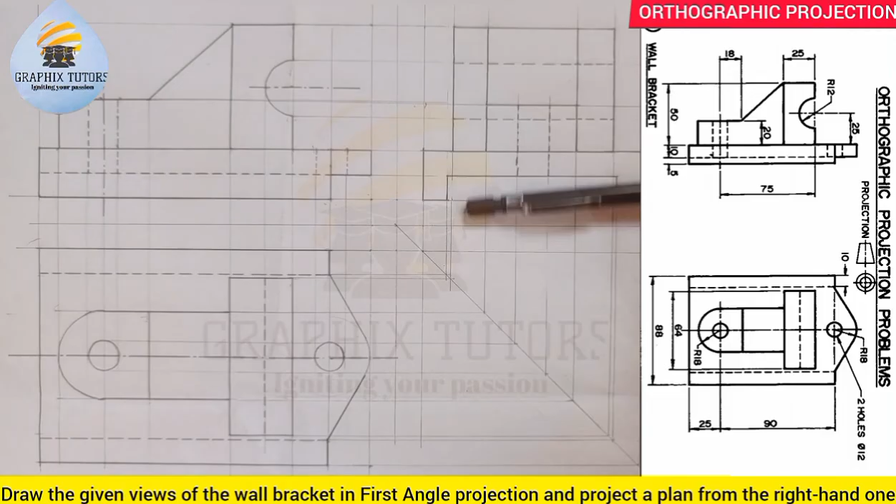And don't forget to put in your dimensioning, right? Whatever dimension is here, just trace the line and do the dimensioning. And your dimensioning is very important.